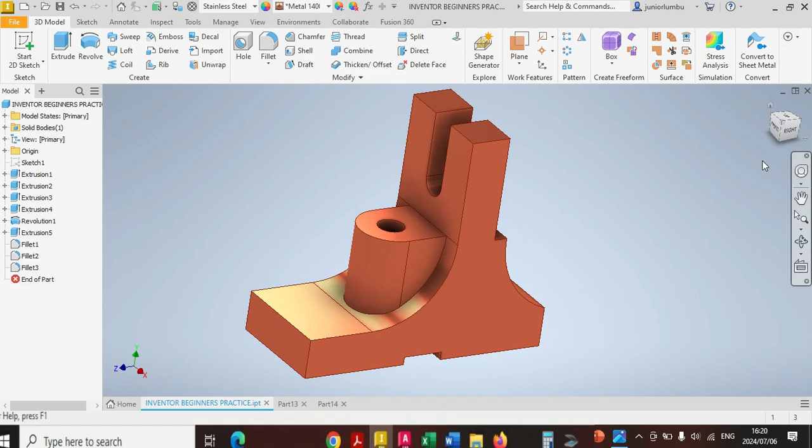Let's draw this figure in front of us. Our dimensions are in millimeters. So we're going to come here, select new metric standard millimeters, then say create.

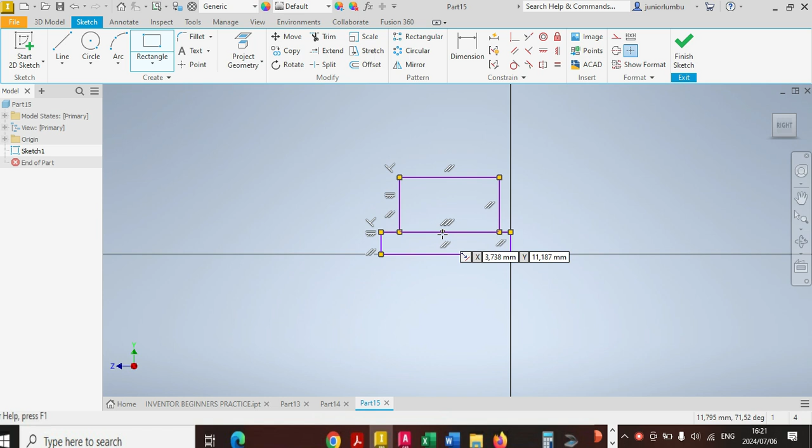Here we are going to start with rectangles. There's our first rectangle. Then here comes our second rectangle. There's our third one, and here is our fourth.

We need to make sure that this one here is 95 millimeters. This one over there needs to be 15 millimeters. And from here to there, I need to have 30 millimeters. This one there needs to be 70 millimeters. That one over there needs to be 15 millimeters.

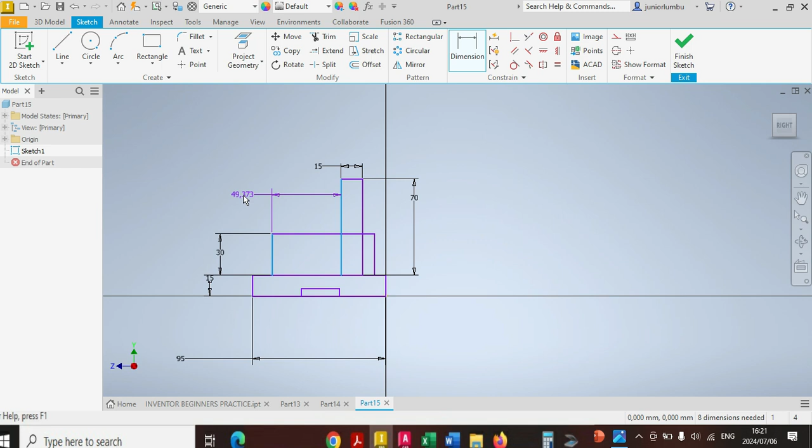And from here to there, I want to have 27.5. Then after that, this one here needs to be 5 millimeters. From here to there, I need to have 55 millimeters. And this one here, from there to there, needs to be 3 millimeters.

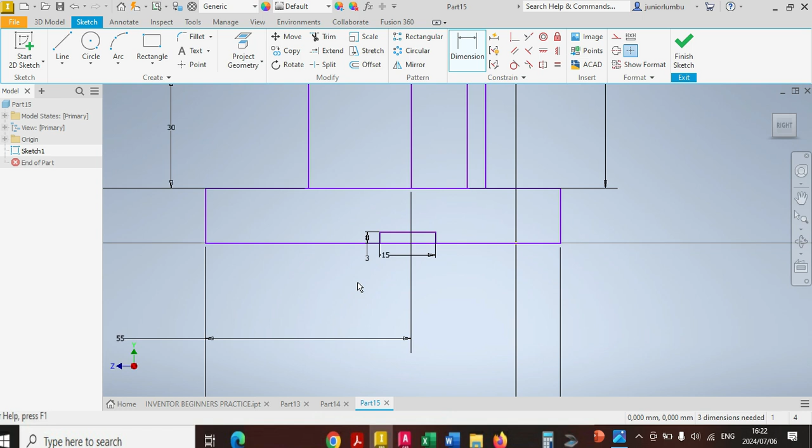That would be 15 millimeters. Now that I have that in place, I need to make sure that from here to there, that needs to be 40 millimeters. Now that I have this in place, what I'm gonna do next is draw this rectangle over there and this line over there.

I need to make sure that this one here is 5 millimeters. And now this one here needs to be in line with that one. And from here to there, that one needs to be 15 millimeters.

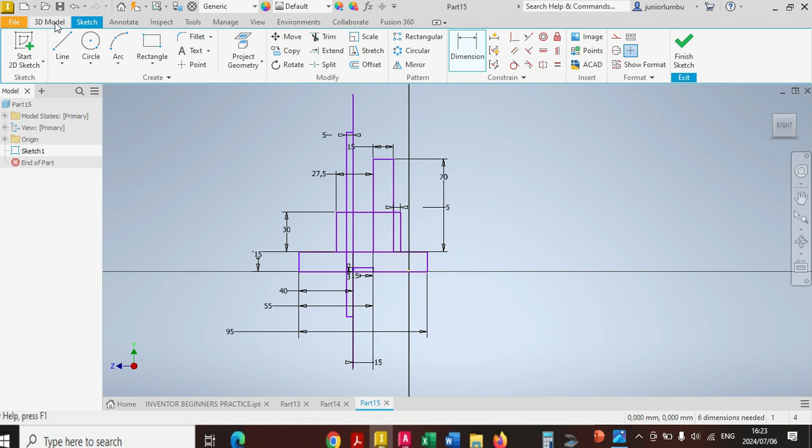Now that I have that in place, what I'm gonna do next is go on 3D. No, before I go on 3D model, I'm going to draw this over here, and make sure that from here to there I have 30 millimeters. Now that you have this in place, I'm gonna go on 3D model.

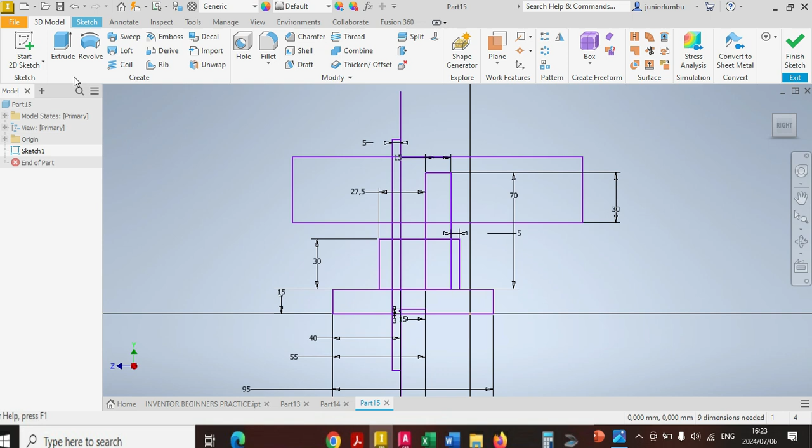I'm gonna go and extrude. Now I'm going to extrude this rectangle by 40 millimeters. I need to use that one there so my drawing can be centered according to the plane. Then I'll say plus.

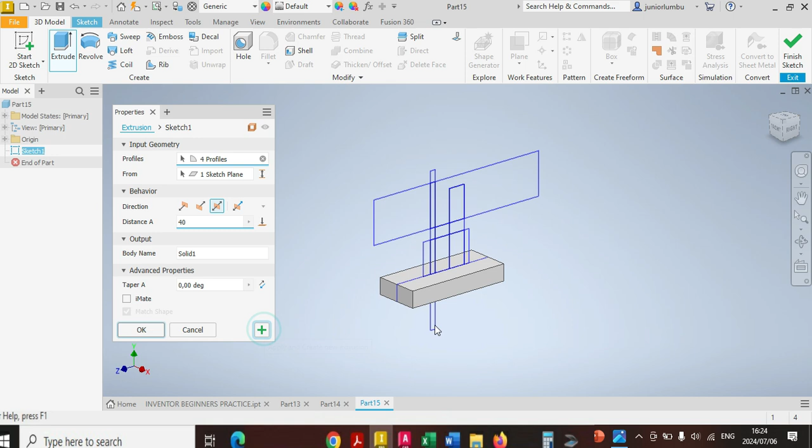I'm going to extrude that one and this one over here, then I'll say plus. The next thing is I'm going to extrude that one by 25 millimeters, then say plus.

Now I'm gonna extrude this one here by 10 millimeters. So I'm going to cut in the between. I'll say cut. Now that I have that in place, I'll say okay.

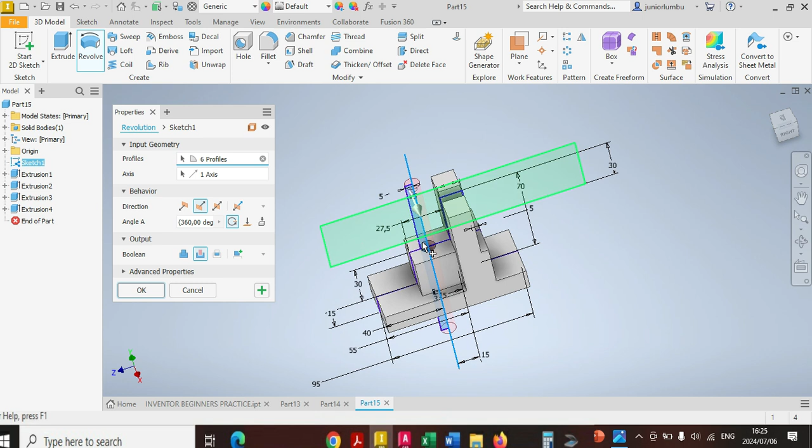After that I'll turn visibility on. I'll go on 3D model and click on revolve. Now I want to revolve this one here against that axis. I'm going to create a hole there, then I'll say okay.

And I need also to cut that one over there. I've forgotten to cut it, so I'll select that. I'll cut it, say 55, like that. I'll say cut. There you go.

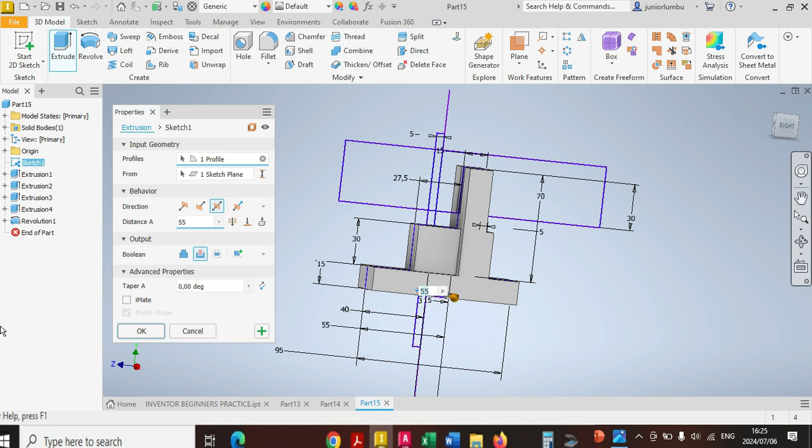This is what you want to have. Then I'll say okay, as it is here. That's one over there. Then I'll turn visibility off. I'll come here.

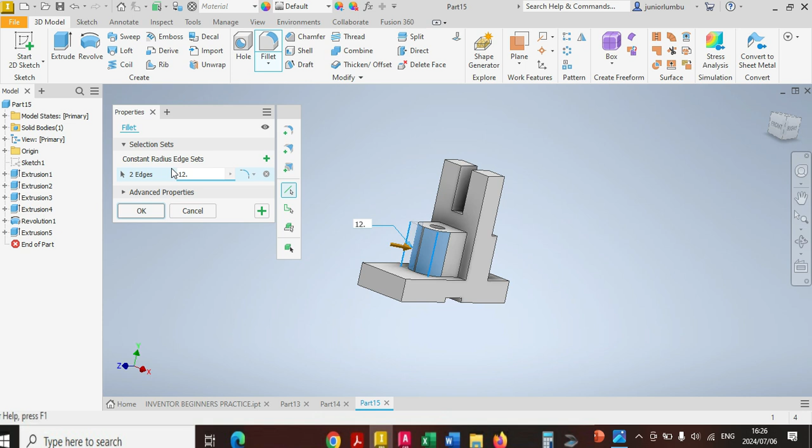I'll create a fillet here with a 12.5 millimeter radius, like that. And then I'll say okay.

After that, I'll come here and create a fillet as well of 30 millimeter radius. The same applies here. Then I'll say okay. Now you have the figure in front of you.

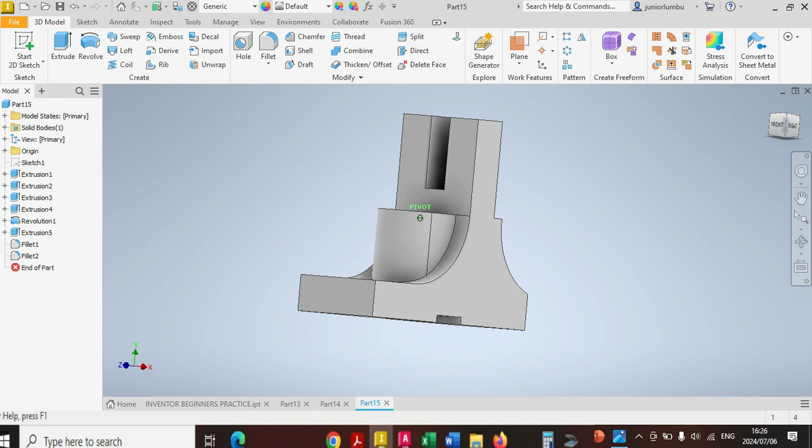The next thing that you want is to choose the material. No, but before you choose the material, you need to create a fillet there of 5 millimeter radius, the same applies there, so you can have the same figure that you see in front of you.

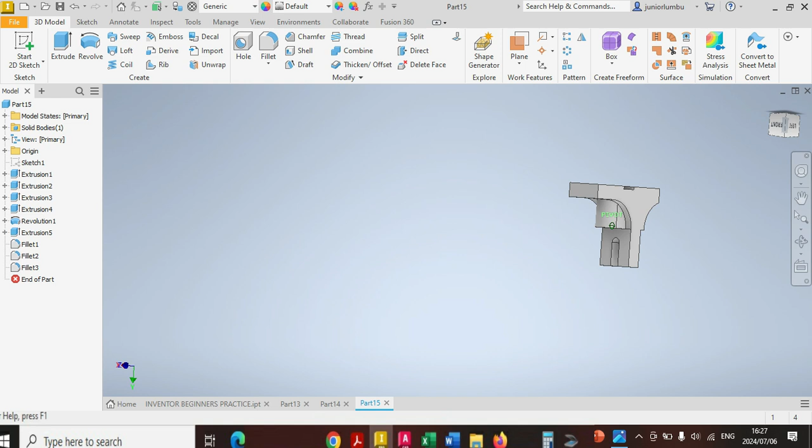So come here, then I'll choose the material. You can also choose the color if you want afterwards, and I'll say this one here needs to be in carbon steel. Where is carbon steel? Here we go. Now you have this beautiful figure or object in front of you.